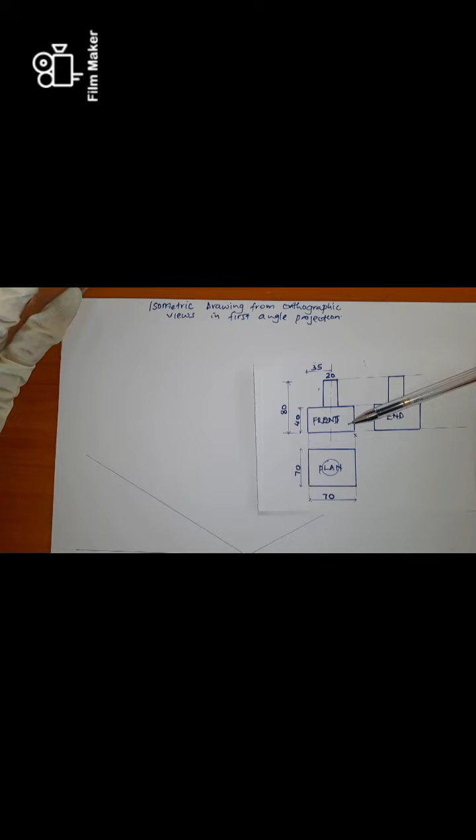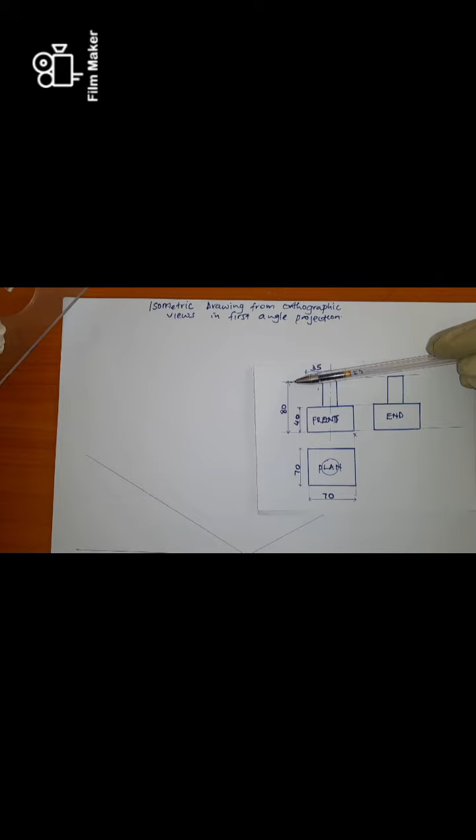So if we are going to draw our solid figure, it means we are going to have a cuboid or rectangular base, and then an extension on top of it which is a circular or cylindrical extension. The first thing we have to do is draw a block diagram measuring the base, which is 70 by 70, with the vertical height of the block being 80.

Out of this we shall cut out the relevant part and get the expected drawing. Taking X as the lowest point, we are going to have point X here, and then 70 on this side and another 70 on this side. So let's proceed.

We can draw a vertical there. So this is our isometric line, as you can see. Because we are drawing in isometric, we have to measure 30 degrees. On this side we are going to have 70, and also on this other side we are going to have 70. From your measuring instrument you can get 70.

You transfer it here and here. And the vertical height, the total height, is 80. You just take your 80 and include it on the total height.

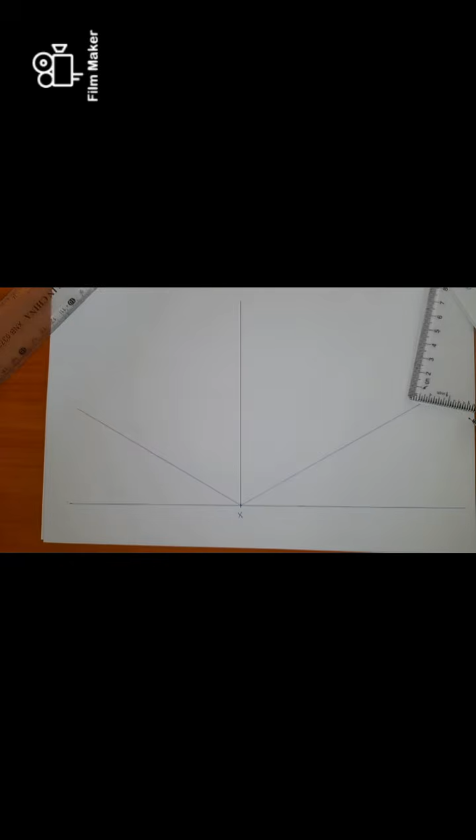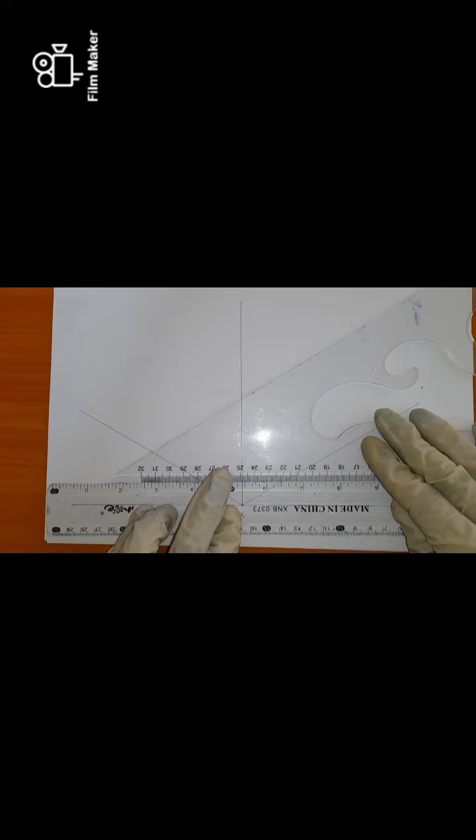So we are using the set squares and the T-square to join the lines, at 30 degrees. You just have to join them. So we can join this. We also join on this other side, at 30 degrees.

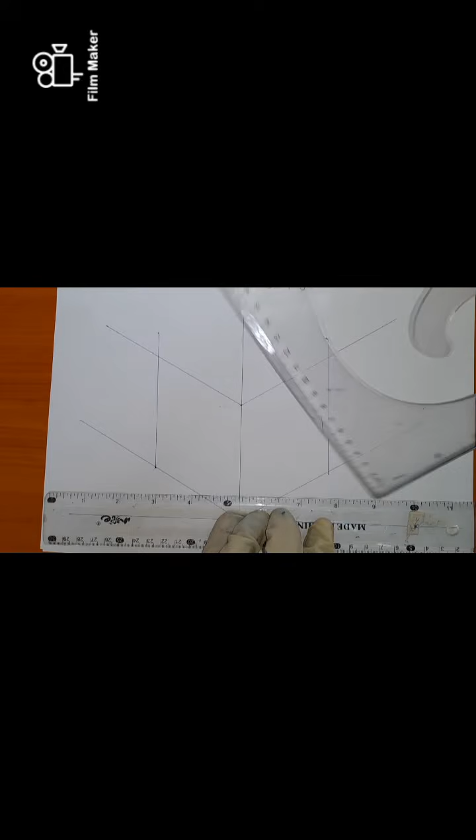Then our vertical, somewhere there. Then we have another vertical on this side. Then you complete this other side. Then you bring and complete this.

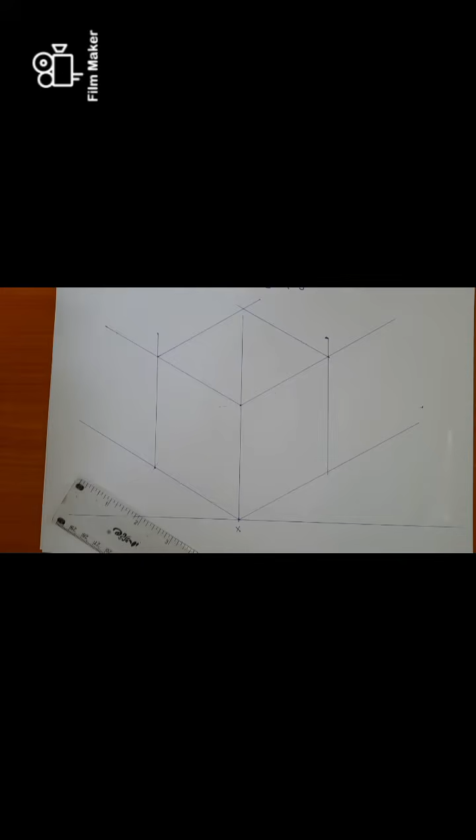So there it comes, that is our block diagram. Now we can still extend because it's a block diagram.

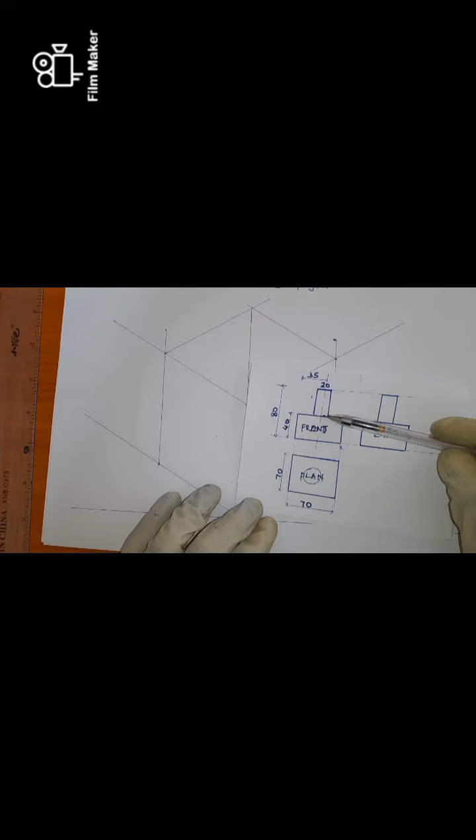Now, looking at this, you would realize that this cylindrical extension is extending from the 40th mark on the frontal part. So we have to measure our 40th mark. We establish a plane midway, where our cylindrical part can be extracted from. So let's measure our 40th mark.

Just measure 40 and put it here. So this is our 40th mark, this is our 40th mark. Then we draw that plane. Just join the plane.

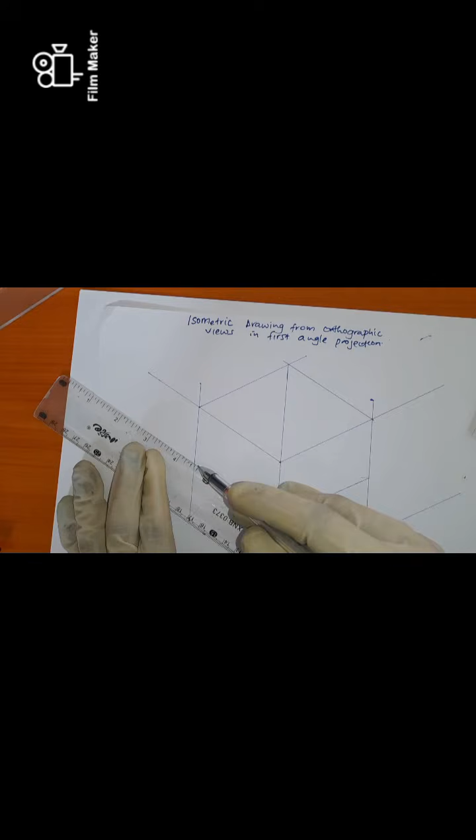So with your set square and T-square, you can include this. Then also include that.

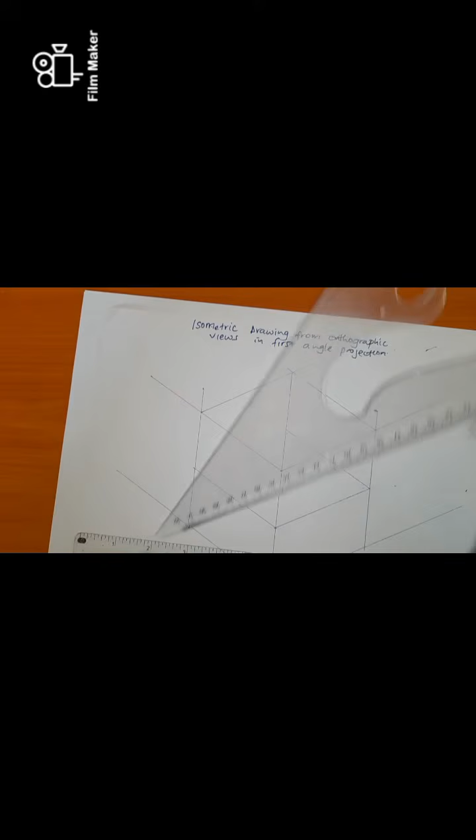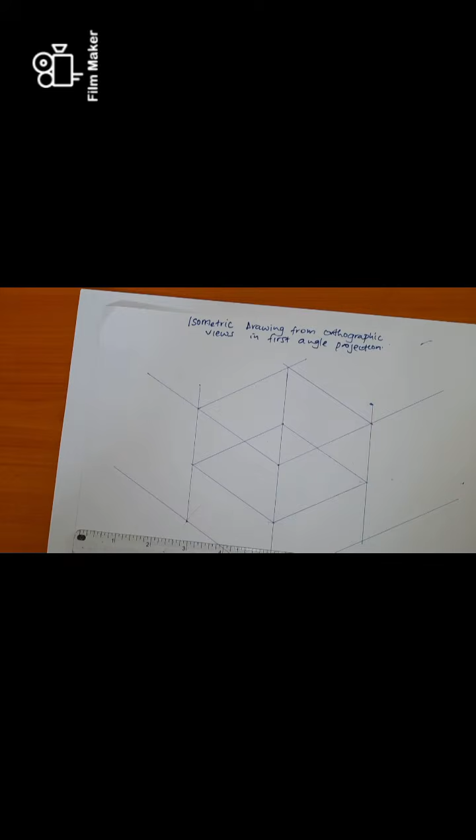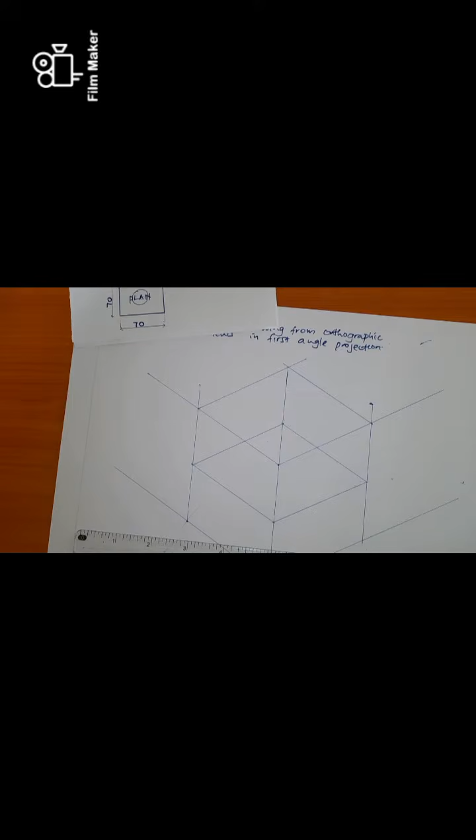So on that plane, we are going to have our cylindrical part. As you can see, this cylinder is in the midway at that 35th mark, because this is 70, so the midway is 35. We are going to have the center lines, which measure 35. That is the center line.

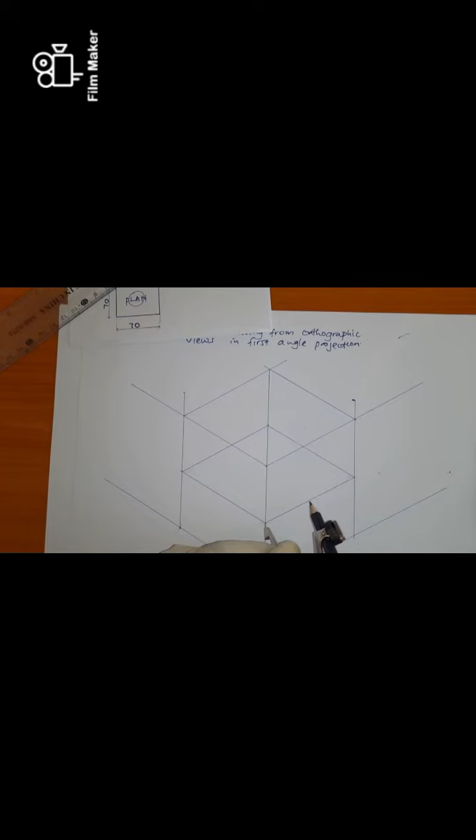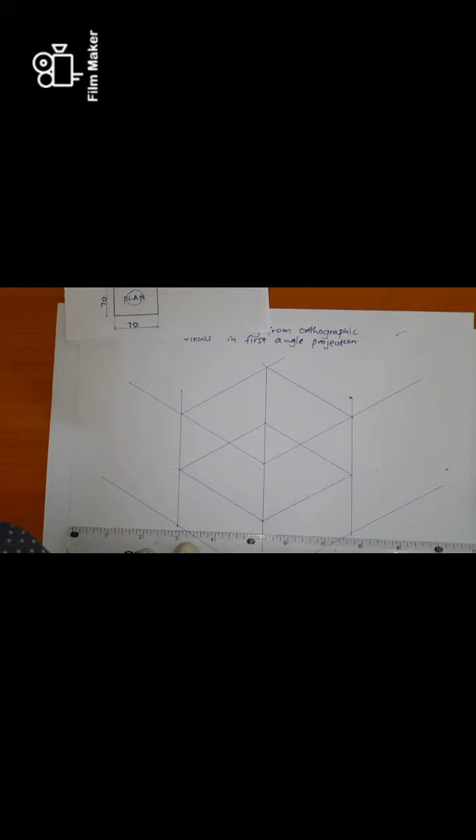So the center line is somewhere here and also here. We establish the center lines using your T-square and set square, at 30 degrees, because it is parallel to the base.

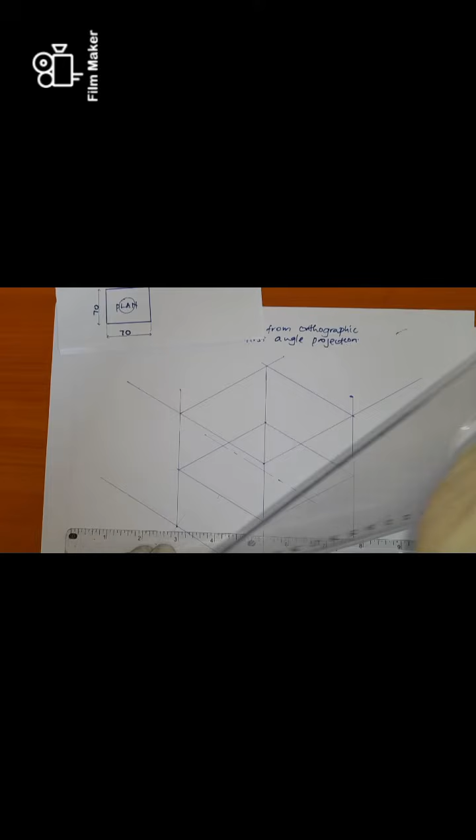Then also we have another center line starting from there. So that's the center line. Of course, this is the center point.

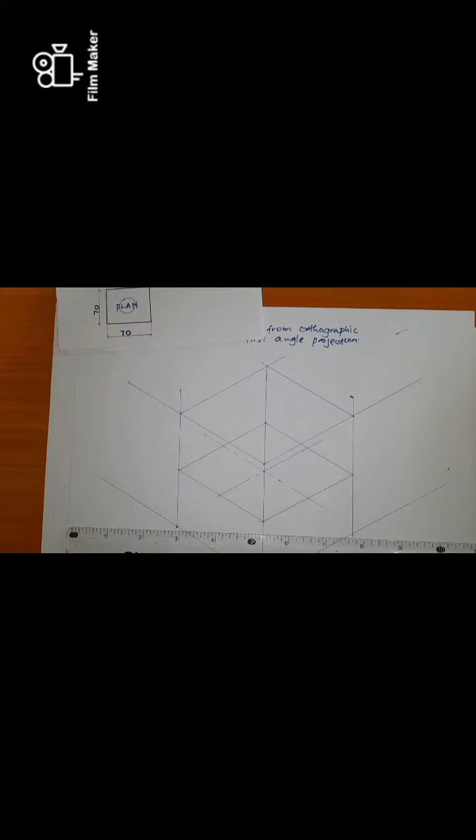Now, for this cylindrical part, we want to establish the center. We are going to have a rhombus. As you can see, the diameter of our circle is 20, so our cylindrical part is 20, meaning we are going to have a radius of 10, 10, 10 each. So we measure 10.

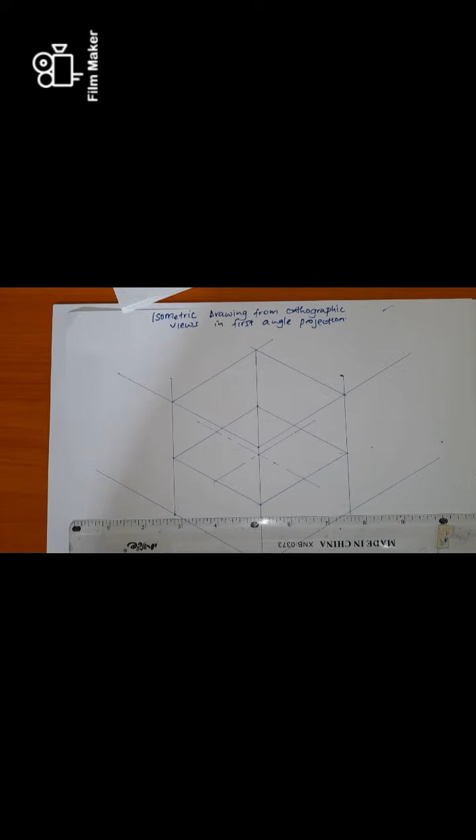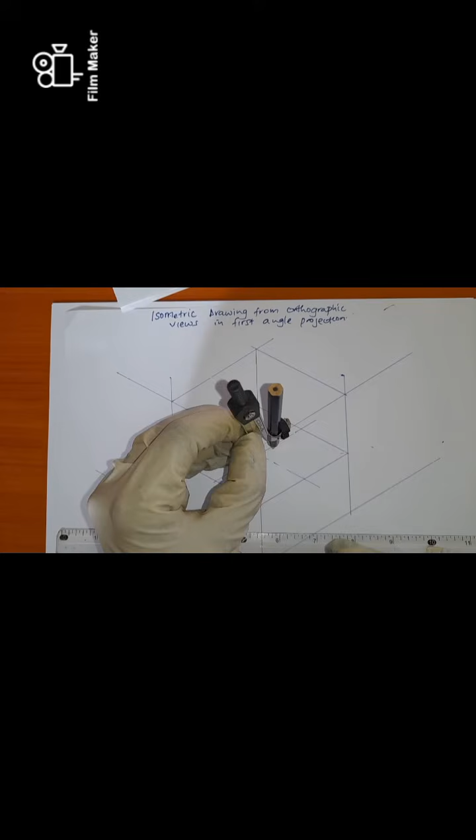So you have to measure 10, 10, 10, 10. So we draw a rhombus.

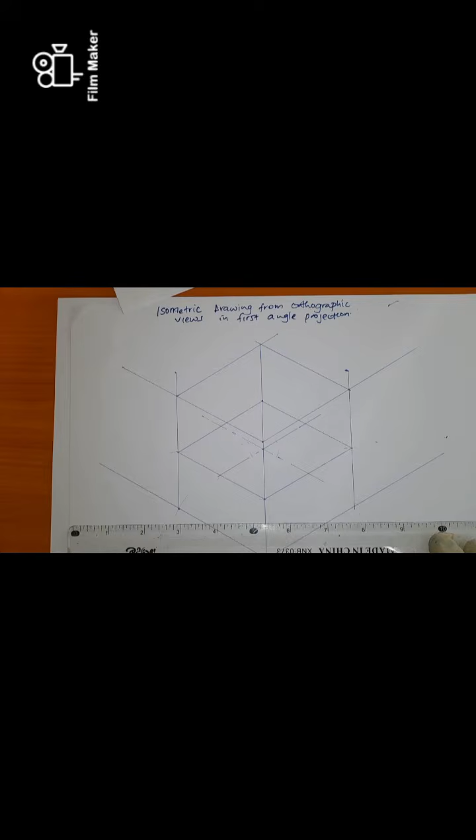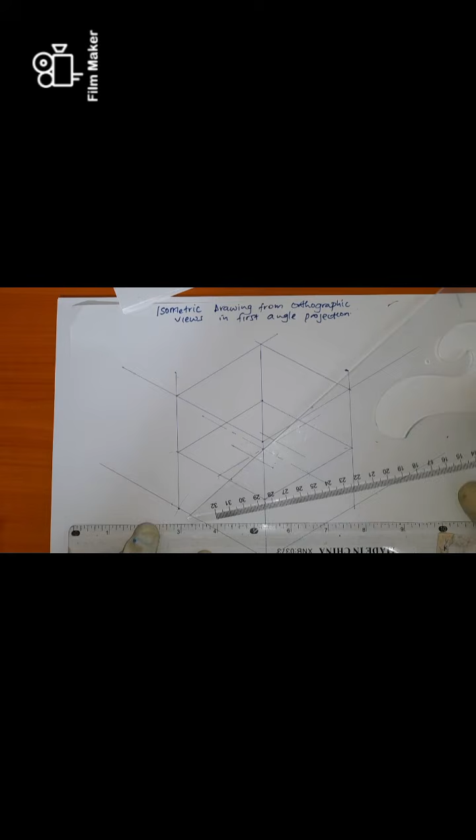This rhombus here passes through those points and also passes here. Then we can bring this, so this rhombus, bring it. Okay.

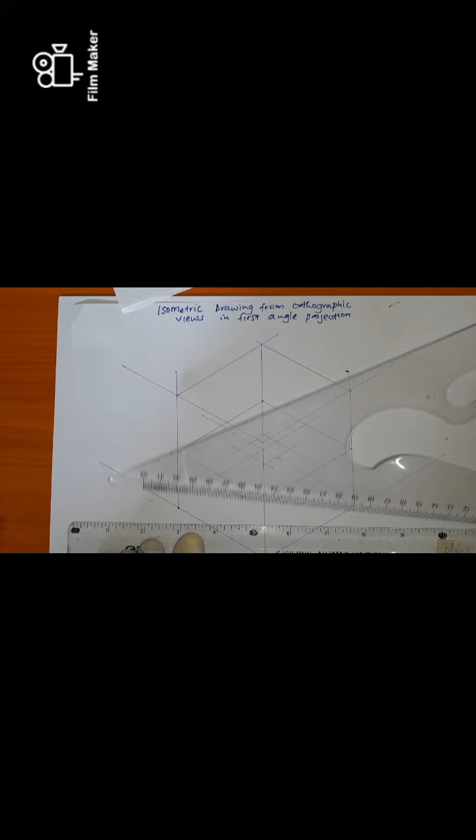That's the cylinder we are drawing. Now you'll realize that the same thing we have done at the base would be the same thing on the top, because the top also has the cylindrical shape. So let's just transfer what we have here on the top part.

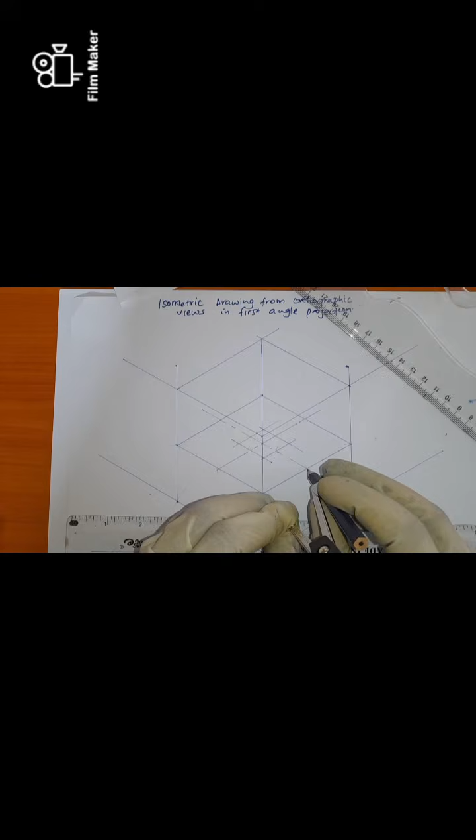We can use a compass to transfer it here, then here, then again, you bring this, you want that center line, then again bring this, complete this.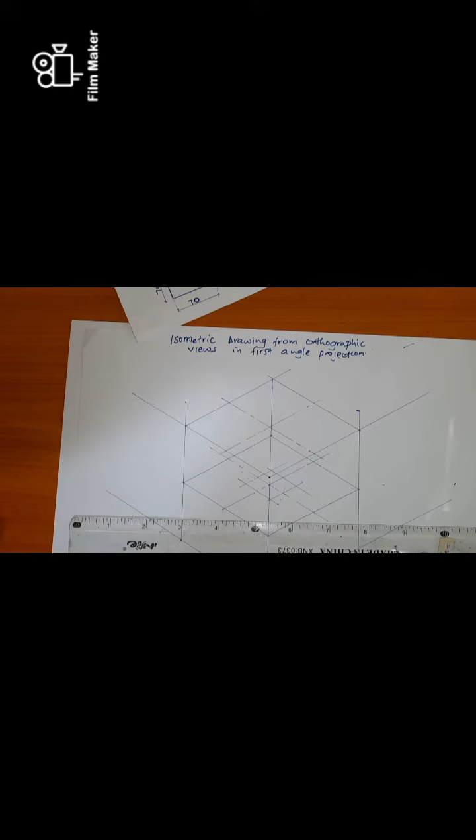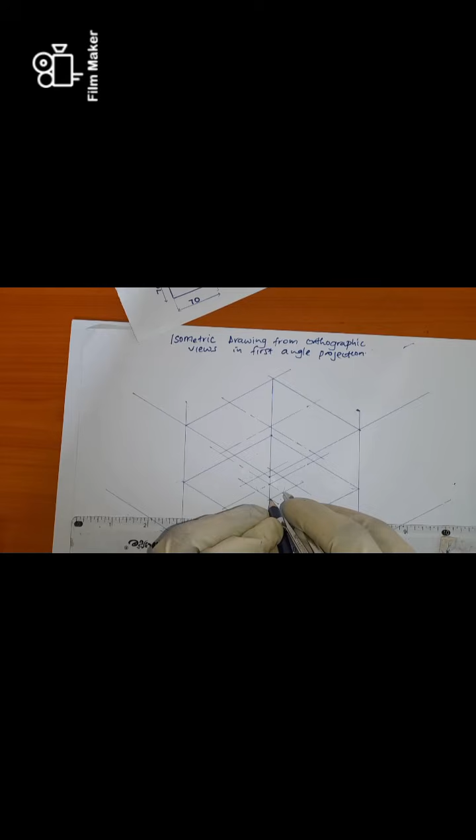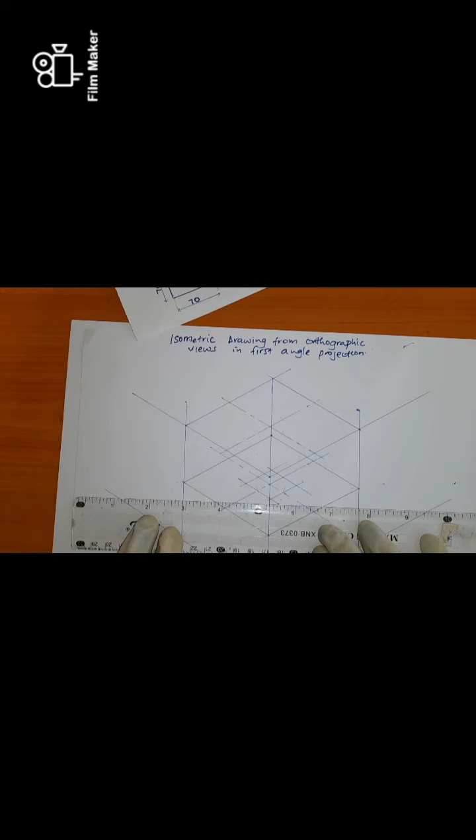You realize that this is another center. So we just bring these dimensions of our rhombus back here, there, here, and here. Then again you join. You join them.

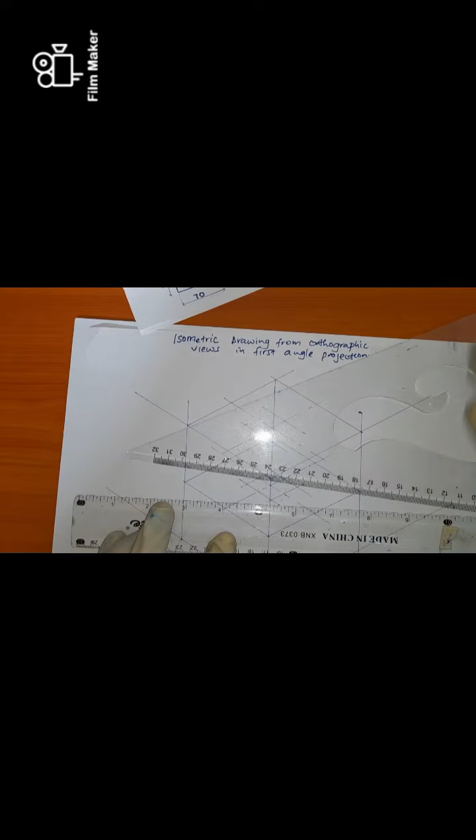There it goes. Bring this. There it goes. Then again include this other side. So this, and then this.

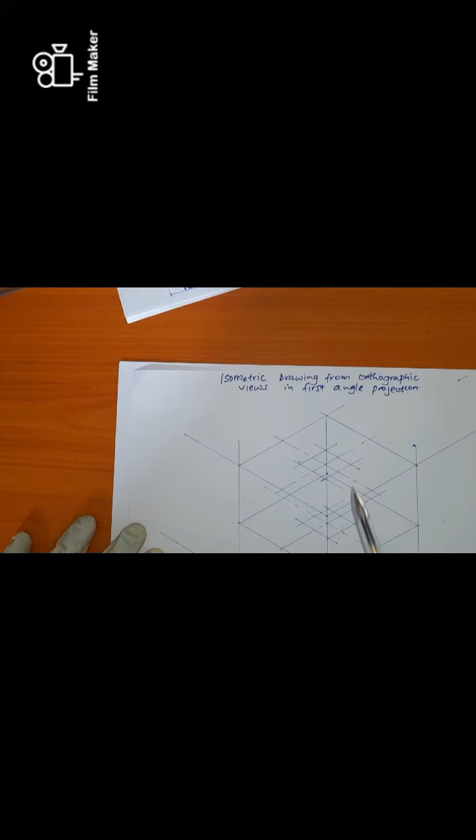Okay, so this cylinder is going to be put such that the circular base is inside that rhombus, and the other base, the top part of the cylinder, is in that part.

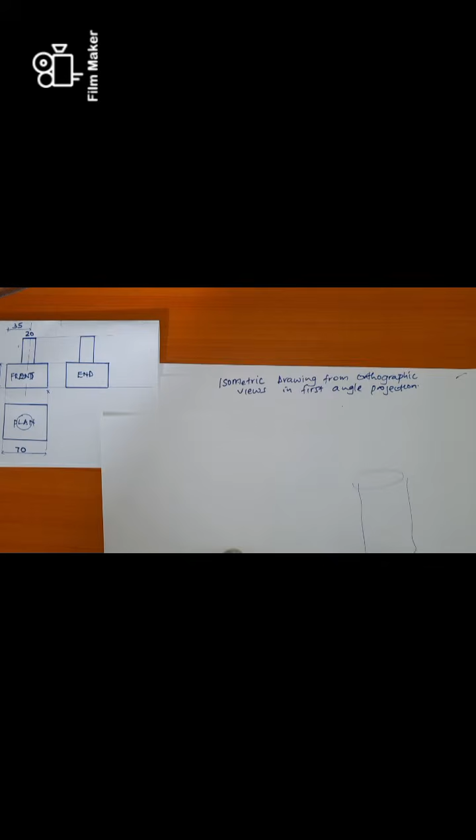So if you are drawing it, you realize that the cylinder will assume such a shape. Let me show you, to assume such a shape, because it is in isometric. That's why it will appear that way.

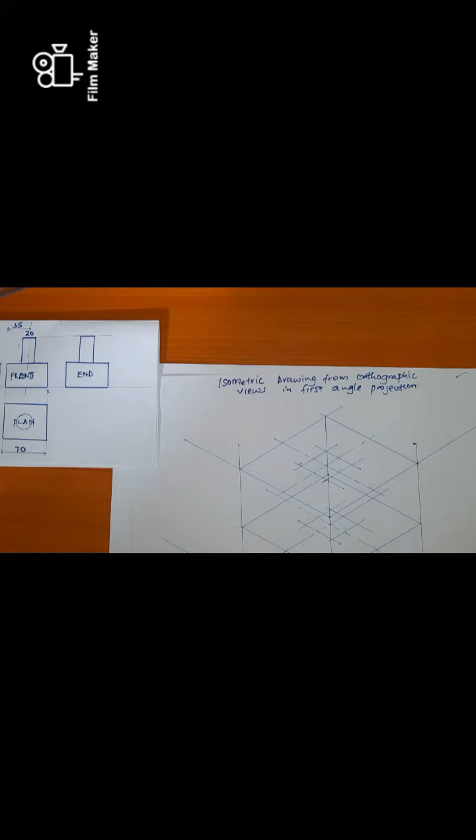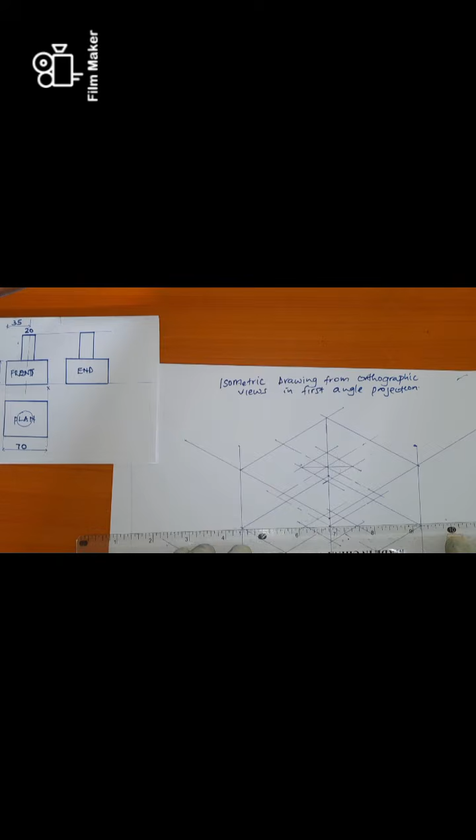So let's draw the top part. We are going to join the longest diagonal. We join the longest diagonal. Of course, this one will still be the same thing down here. We join the diagonals.

Now we are going to have some centers, but before that we shall join this midpoint to that point, this midpoint to that point. So we can join this midpoint, also join this midpoint. Okay.

So with your compass you can have the centers. The first radius is here. We take this up to that point, then we complete our circle. We come back here, we complete, because it should be the same radius. Just come here, you pick it, then you come here again, complete that.

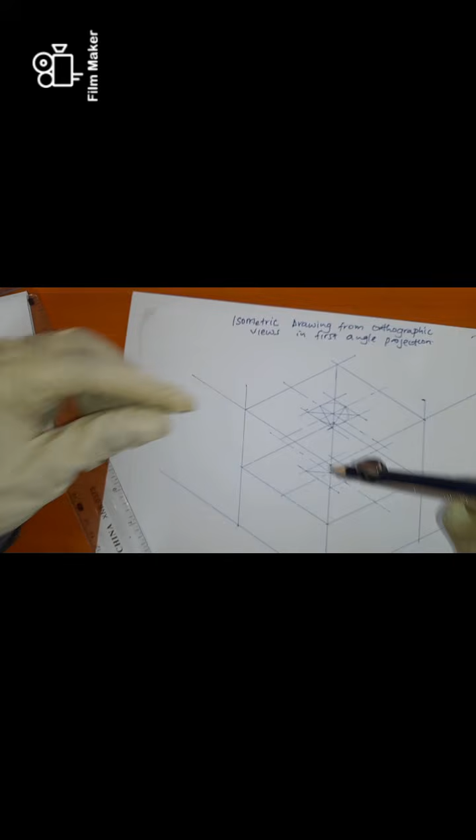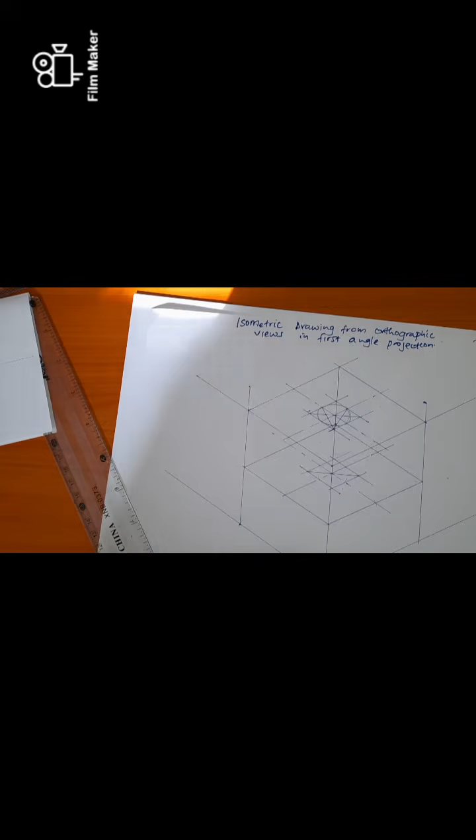Okay, then now we want the other side. Take the smaller radius, then you complete your circle. Okay, and then you come and take this other, complete this. That is the circular top. That's the circular top.

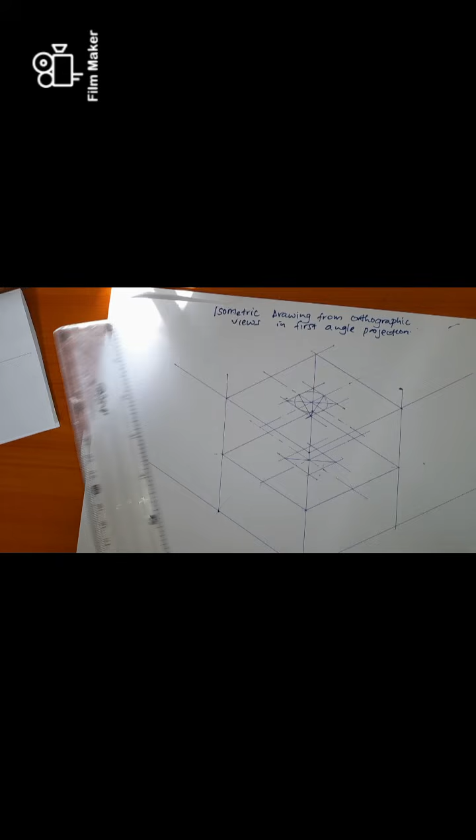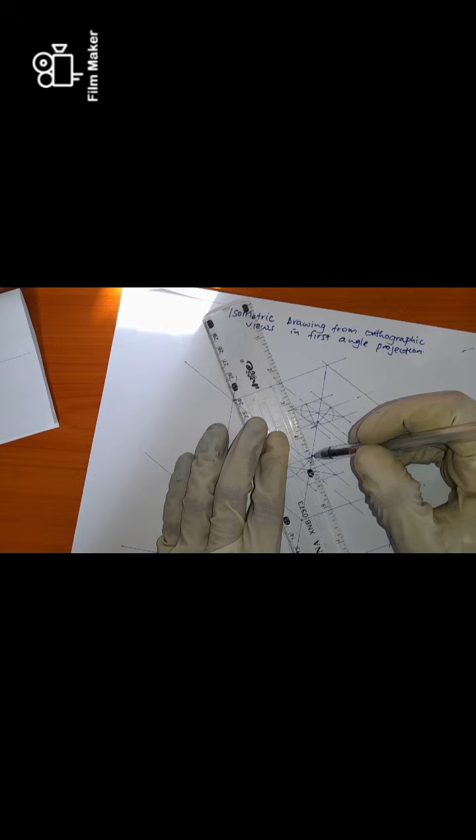Now at the base, we are only going to have this side. So that means we can still join the longest radius and this midpoint. Okay, not necessarily that, we can still join this midpoint. It's more of the same thing, it's only that I want to draw this curve, and that's why I would wish to join the other midpoint from the other corner, because I want this curve. But it still applies even if you join this way, you will still take the same radius, but you stand now on the other side.

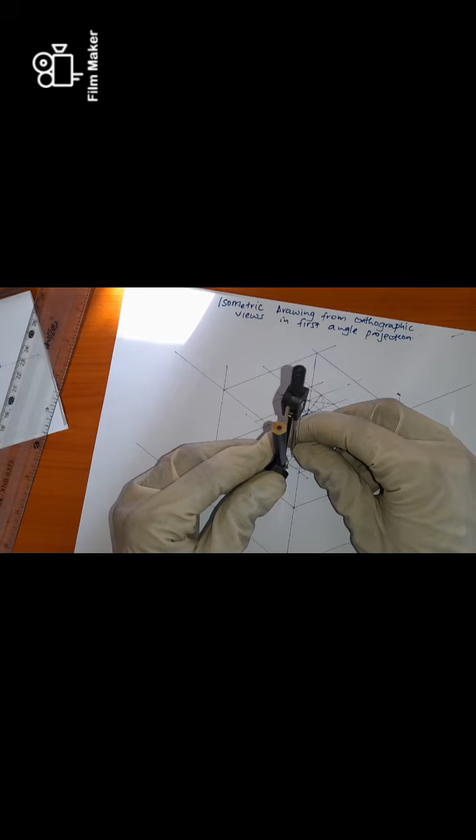So this radius here is what I'm interested in, to give me this arc. Okay, once you have this arc, of course you are going to have this one to draw some bit of the arc from here, and of course we are going to have a tangent.

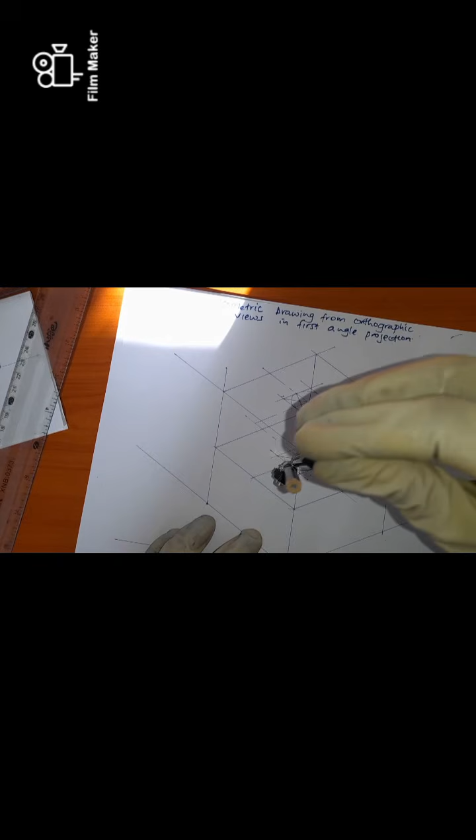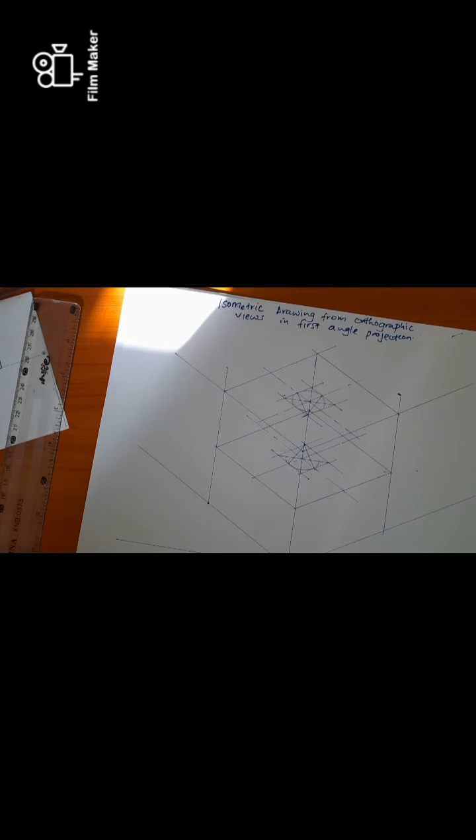It's not going to go so far, just have some bit of it. Again on this other side, just some bit of it. Get the point? Then we are going to join using tangent from the top part. So we join this. Then we join this. And then of course we shall join this.

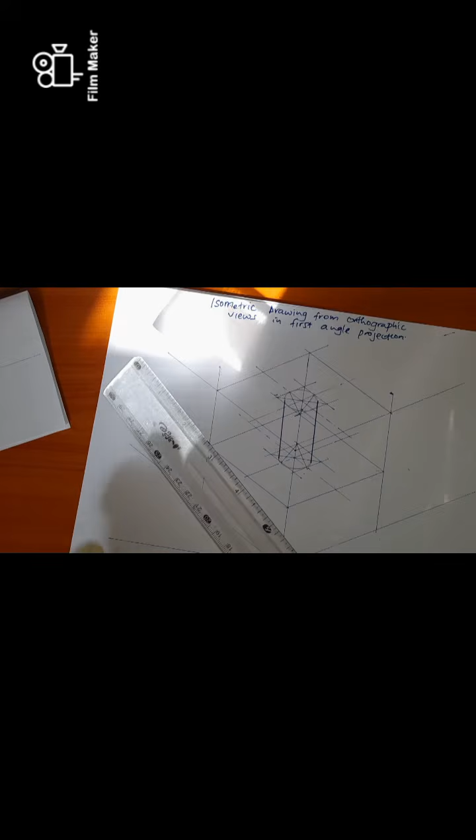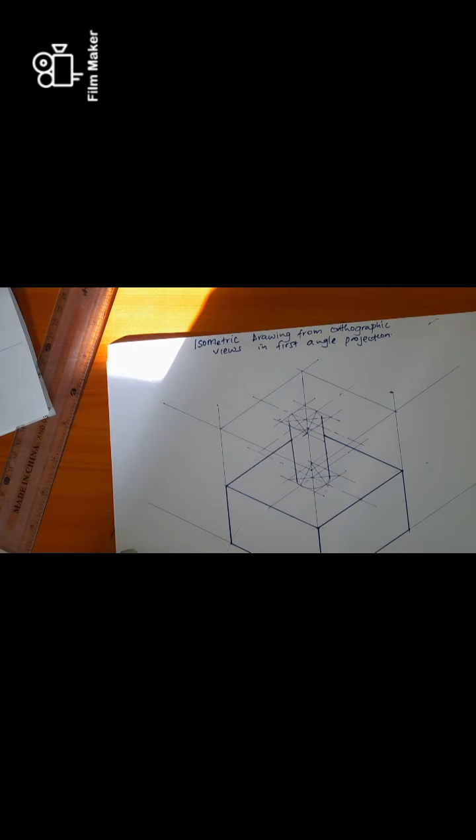We join all the necessary lines that are expected to be joined. So we continue. Now also, in this case, allow me to use a free hand to join the curve so that at least it's more clear.

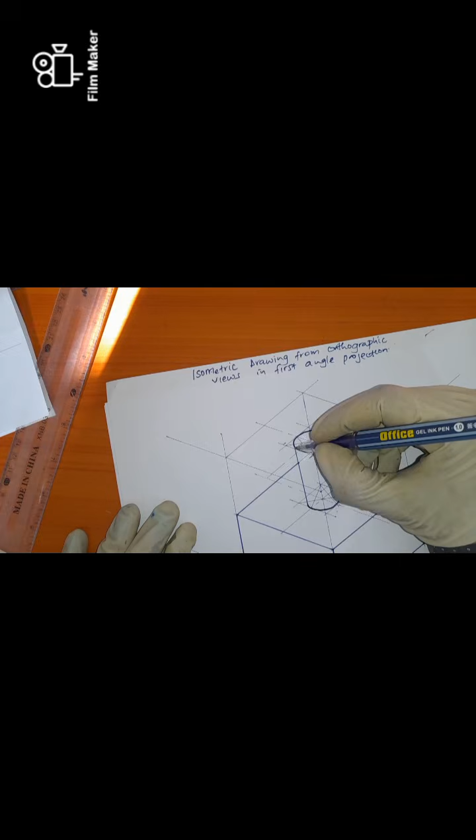Just for today, just allow me for today. Join that. I'm trying to make it more clear. So this is what we expected to draw.

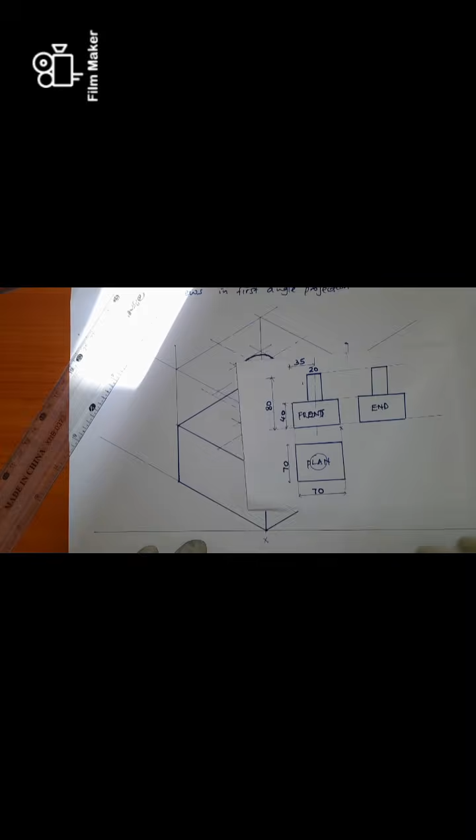Out of these views, you would realize that we have the frontal part, the frontal part, and the end, that gives me this, and the plan from top that gives me a circular part and a rectangular cuboid.